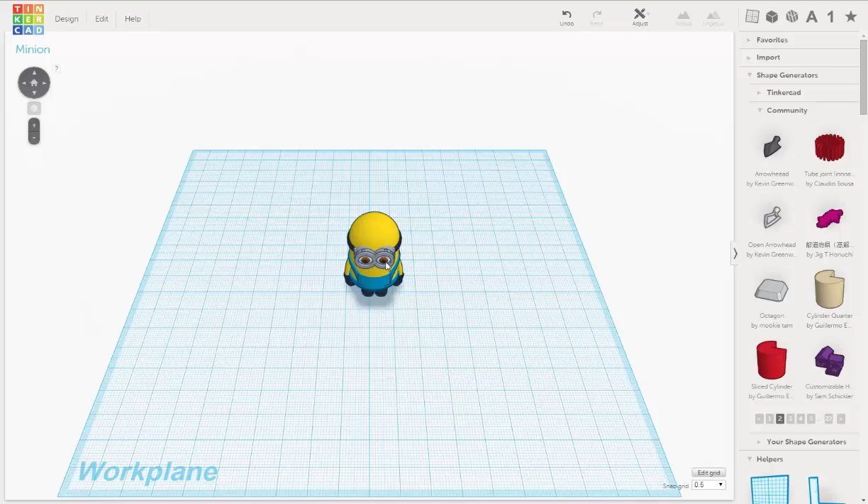Okay, so we are back, and what we're going to do next is we're going to fix the eyes of our little minion here. The reason being is I have seen some better reference images of their eyes from the side, and I've also seen a really cool display in movie theaters for the new Minions movie with full size 3D minions, where you can see all the detail up close. They have very flat eyes, almost perfectly flat, and that would make things a lot easier and lower the chance of printing errors with slight curvature and gaps.

So I want to adjust the eyes back for that. Let's delete our eye.

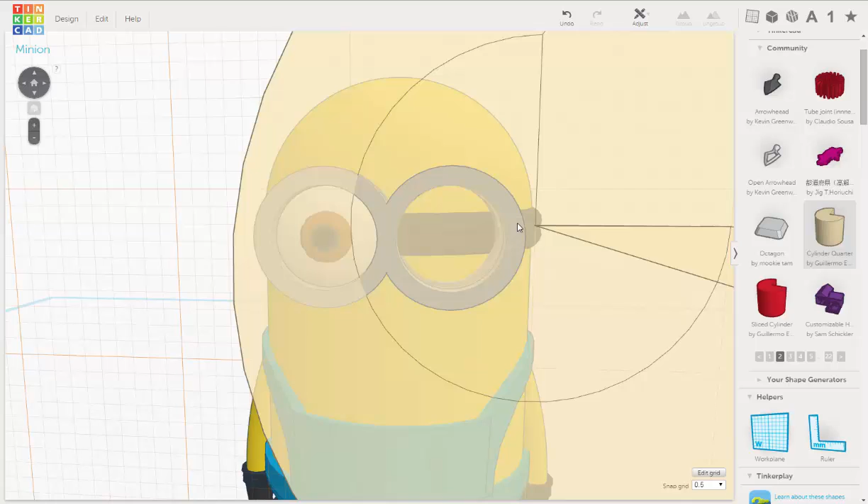Then we're going to use our work plane tool to make things a little easier. I'm going to drag that onto this flat surface on the rim of his goggles, and that'll create the work plane there. Then I'm going to go up to our community tab under shape generators and get our cylinder quarter tool, which gives us a lot more control and makes things easier when we make the iris and pupil for his eyes.

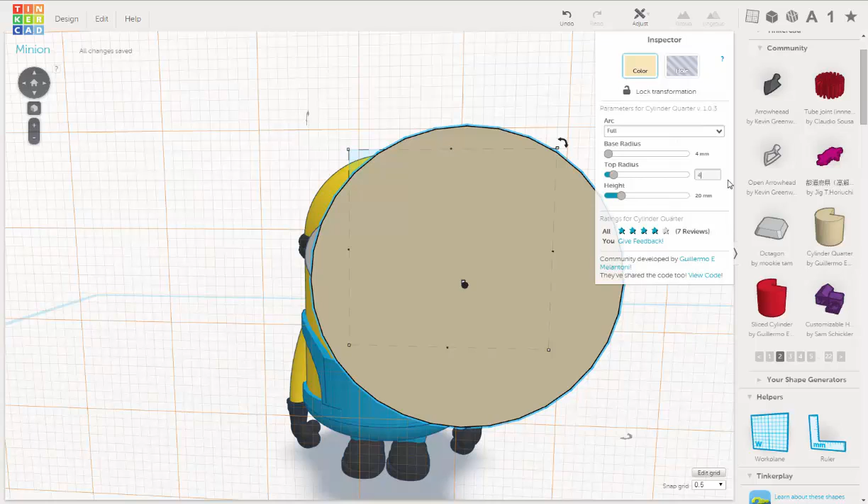First thing we want to do is go to full, and then let's drop his radius down to 4. And the height down to 5. Let's drop the radius, still looks big, so let's go to 3.

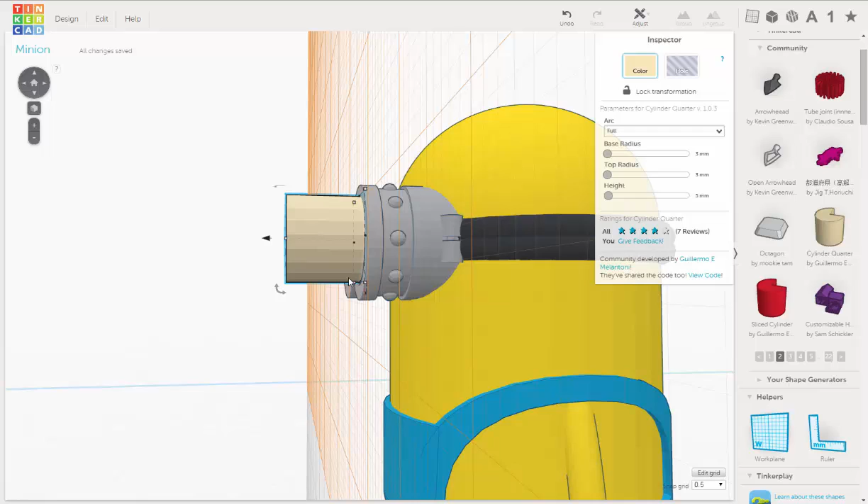Okay, now let's roughly place it with our arrow key. Now I'm going to push the cylinder in just a little more, and lower it down a little bit. It's still a little small, so let's go up to 4 again.

Let's try to place that better. I'm going to go down to 0.25 on the snap grid and use the arrow key on the keyboard. So it's aligned pretty well, but it's a little too small, so let's go to 4.5. That's a little too big too, so let's go down to 3.5.

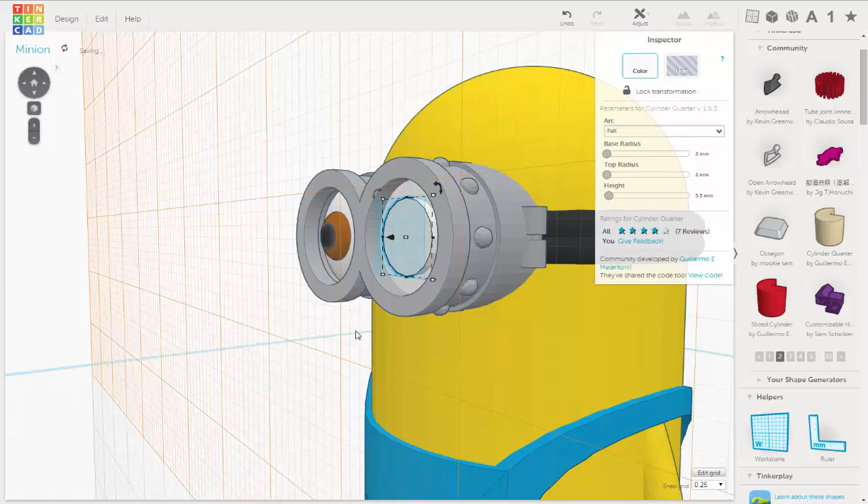So now we're going to select it, hit duplicate, and go down to 2 on the radii. Let's make the height 6 - that popped it forward, good, so that's a little too far. Let's go to 5.5 on the height instead. And let's turn that color to brown.

Then let's make another duplicate, edit duplicate. Let's make this 6 on the height, change the color to black, and make the radii 1.

Looks pretty good, but I want that a little smaller, so let's go to 1.7. There we go.

Let's look at our reference. I'm going to try to make the pupil smaller, so let's go to 0.5. There we go, I think that feels better. This could be smaller too, so let's just go to 1.5.

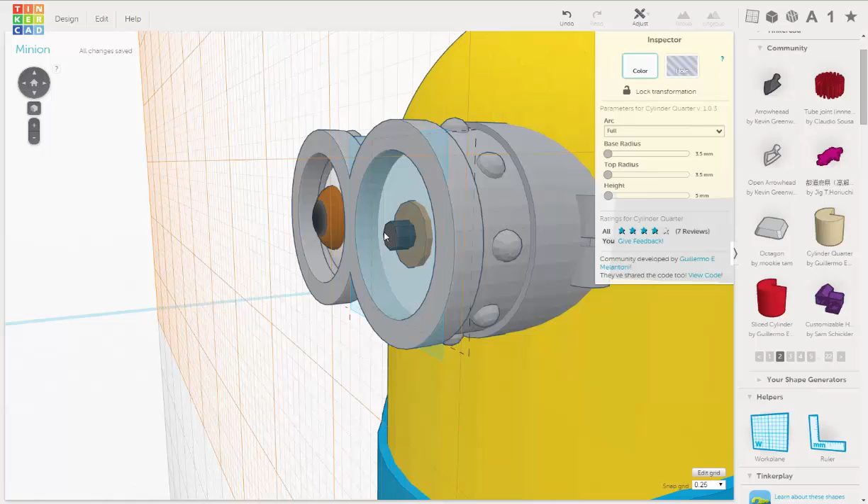And I'm going to move this down and in, closer to the eye, there, like that. And I'm going to do the same with the pupil, there we go.

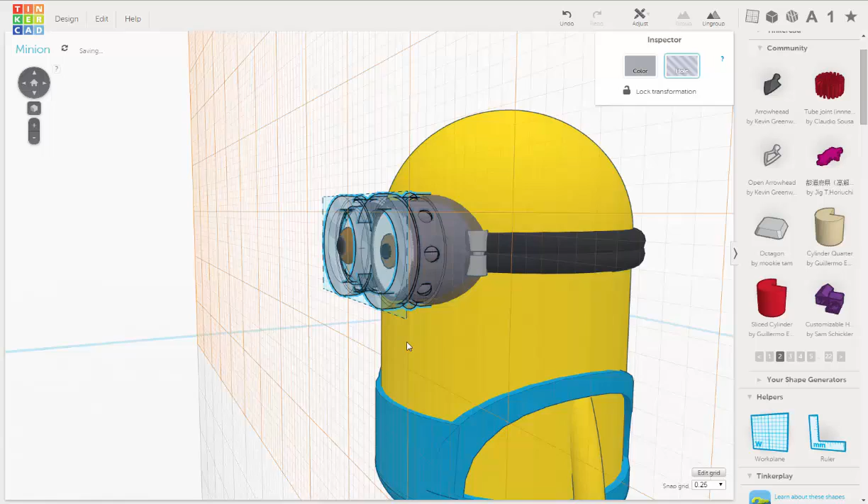The great thing about this is we can just duplicate this and slide it over. But first, I want to turn this clear and just see how far this goes - good. So what I'm looking for is I want to make sure this fills up this volume so there aren't any gaps that could cause issues for 3D printing, and it's doing that perfectly.

I'm going to leave that. I'm going to select the eye and shift select the pupil and the iris, group those, and go under color, multicolor. Then I'm going to select this eye and delete it, select this eye group again, and duplicate it, edit duplicate.

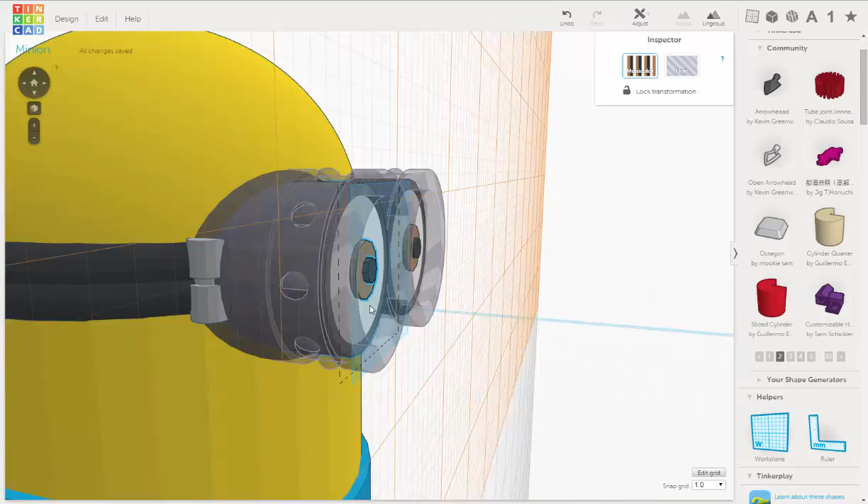We're going to switch back to 1 on the snap grid, and I'm going to use the arrow key to slide that over and see how that looks, see if it feels aligned. Let's turn this back to gray. There - that looks even better. Let's drag our plane down onto the ground.

And he looks much cooler. Okay, so I just want to change this color, it's a little too light brown. And let's make this...

Actually we have to ungroup these first. So ungroup, then select this, go dark brown - it's a little too dark. So let's go to custom and just lighten it up a little bit. Still a little dark. There you go, switch it more to a lighter brown. Okay, that feels good.